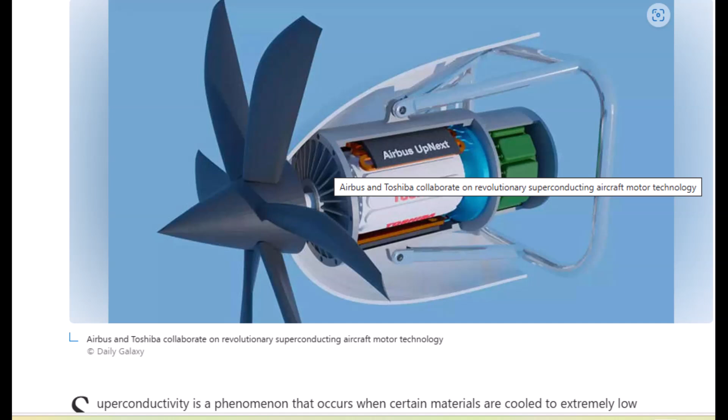Headline reads, Airbus and Toshiba collaborate on revolutionary superconducting aircraft motor technology. Ahead of you is a picture of this motor, and you can see the propeller, the engine, all the different parts, including the frame. Caption reads, Airbus and Toshiba collaborate on revolutionary superconducting aircraft motor technology. Copyright Daily Galaxy.

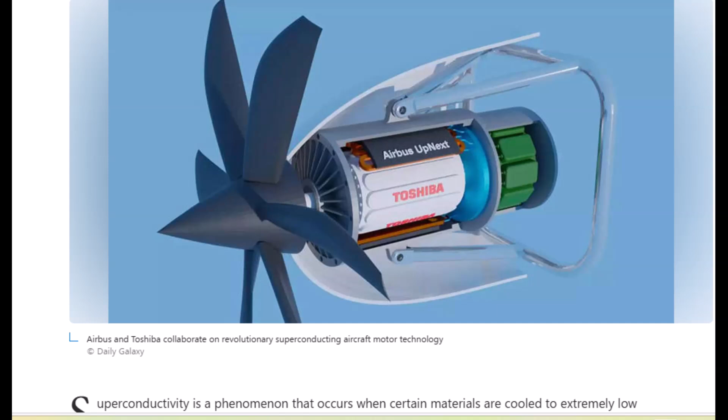Superconductivity is a phenomenon that occurs when certain materials are cooled to extremely low temperatures, causing their electrical resistance to drop to nearly zero. This property allows the creation of powerful and efficient magnets, which can be utilized in various applications, including medical imaging or MRI scanners, particle accelerators, power transmission networks, and electric motors.

In the context of aviation, superconducting motors offer significant advantages over conventional systems. Airbus claims that the superconducting motor is over 3 times lighter than traditional alternatives and boasts an impressive 97% powertrain efficiency rating. This remarkable improvement in power-to-weight ratio makes superconducting motors an attractive option for aircraft propulsion.

The collaboration between Airbus and Toshiba brings together 2 industry leaders with extensive experience in their respective fields. Airbus, through its subsidiary Airbus UpNext, has been exploring innovative propulsion technologies, while Toshiba's energy arm, Toshiba Energy Systems and Solutions Corporation, has been developing superconducting motor prototypes for over half a century.

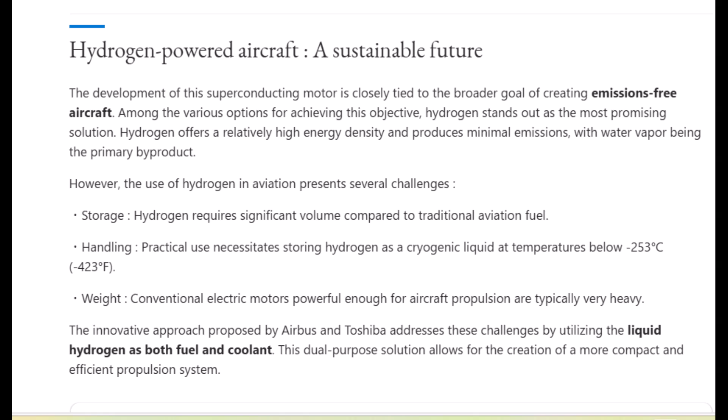However, the use of hydrogen in aviation presents several challenges. The first is storage, which is that hydrogen requires significant volume compared to traditional aviation fuel. For handling, practical use necessitates storing hydrogen as a cryogenic liquid in temperatures below minus 253 degrees Celsius, that is minus 423 degrees Fahrenheit. Weight: conventional electric motors powerful enough for aircraft propulsion are typically very heavy.

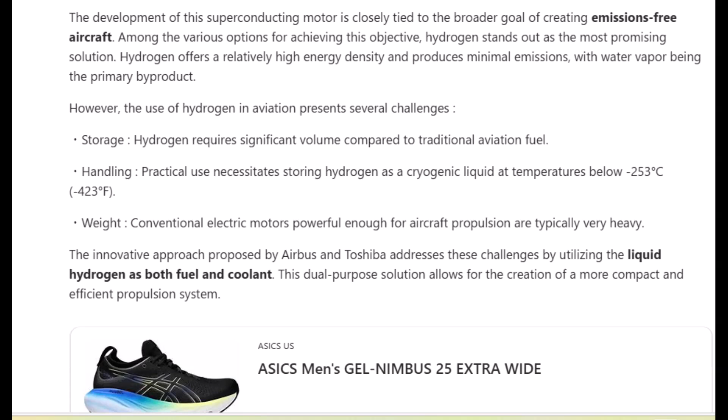The innovative approach proposed by Airbus and Toshiba addresses these challenges by utilizing the liquid hydrogen as both fuel and coolant. This dual-purpose solution allows for the creation of more compact and efficient propulsion systems.

Synergy of technologies: Cryoprop and superconducting motors. The partnership between Airbus and Toshiba, officially signed at Japan Aerospace 2024, combines 2 key technological improvements. By integrating these technologies, the companies aim to create a breakthrough propulsion system that could redefine aircraft design possibilities.

The liquid hydrogen used to power the fuel cells will first cool the superconducting electric motor before being fed into the fuel cell itself. This ingenious approach maximizes the efficiency of the entire system.

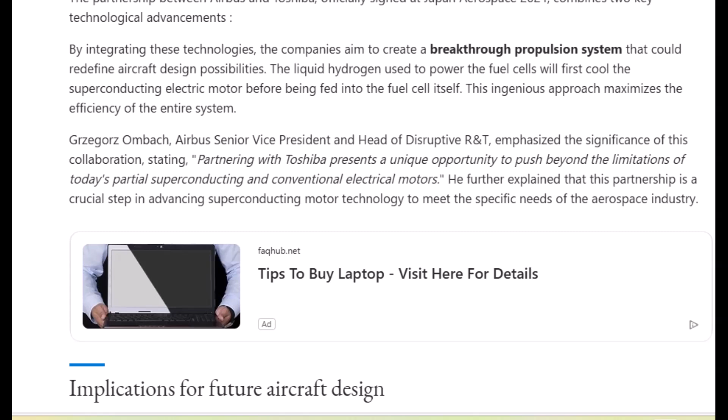Grzegorz Ombach, the Airbus senior vice president, head of disruptive R&T, emphasized the significance of the collaboration, stating: 'Partnering with Toshiba presents a unique opportunity to push beyond the limitations of today's partial superconducting and conventional electrical motors.' He further explained that the partnership is a crucial step in advancing superconducting motor technology to meet the specific needs of the aerospace industry.

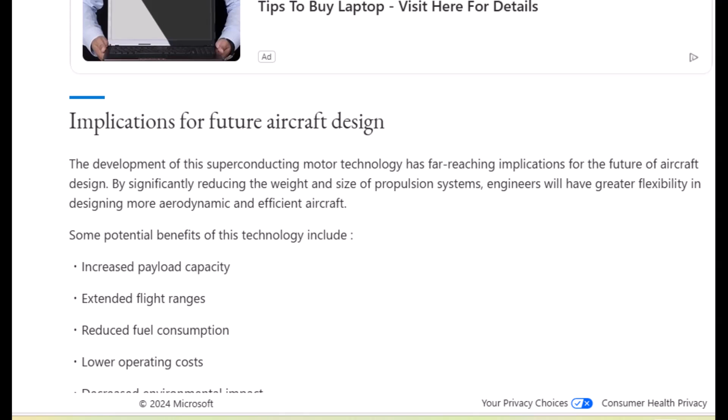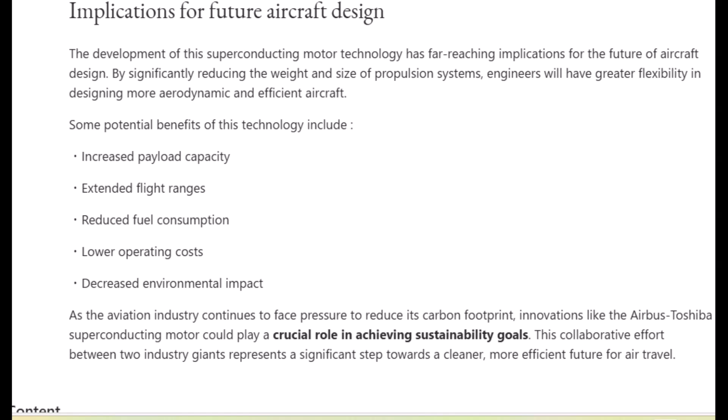Implications for future aircraft design. Development of the superconducting motor technology has far-reaching implications for the future of aircraft design. By significantly reducing the weight and size of propulsion systems, engineers will have greater flexibility in designing more aerodynamic and efficient aircraft. Some potential benefits of the technology include increased payload capacity, extended flight ranges, reduced fuel consumption, lower operating costs, and decreased environmental impact.

As the aviation industry continues to face pressure to reduce its carbon footprint, innovations like the Airbus Toshiba superconducting motor could play a crucial role in achieving sustainability goals. The collaborative effort between the two industry giants represents a significant step towards a cleaner, more efficient future for air travel.

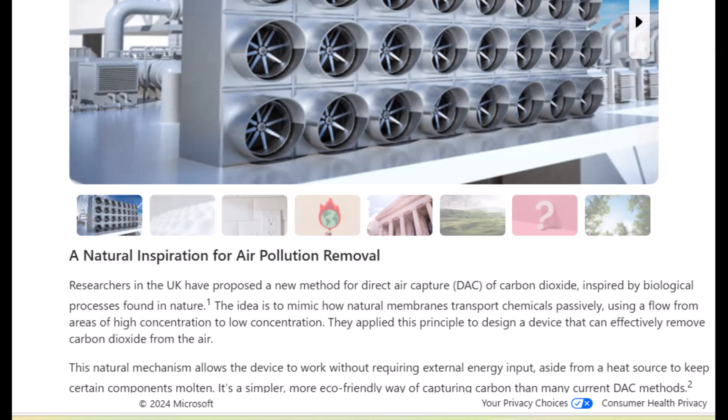Headline reads, Scientists make revolutionary breakthrough in air pollution removal without any electricity. Here's how it works. What you're looking at is actually a slideshow with an explanation. So we're going to do 8 of the slides, and for the first one, we're looking at said device here.

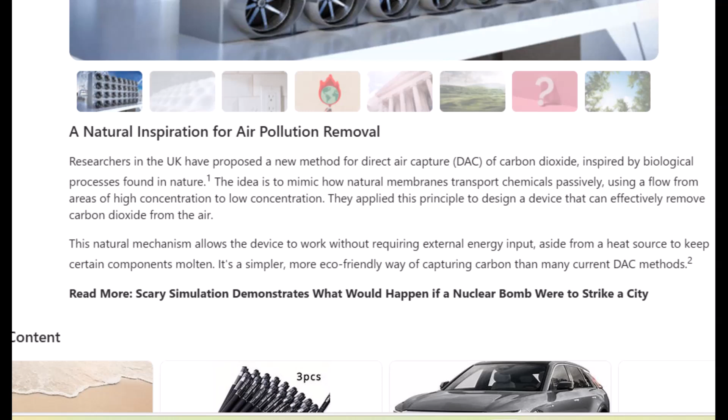Natural inspiration for air pollution removal. Researchers in the UK have proposed a new method for direct air capture, or DAC, of carbon dioxide inspired by biological processes found in nature. The idea is to mimic how natural membranes transport chemicals passively through a flow from areas of high concentration to low concentration. They applied this principle to design a device that can effectively remove carbon dioxide from the air. The natural mechanisms allow the device to work without requiring external energy input, aside from the heat source, to keep certain components molten.

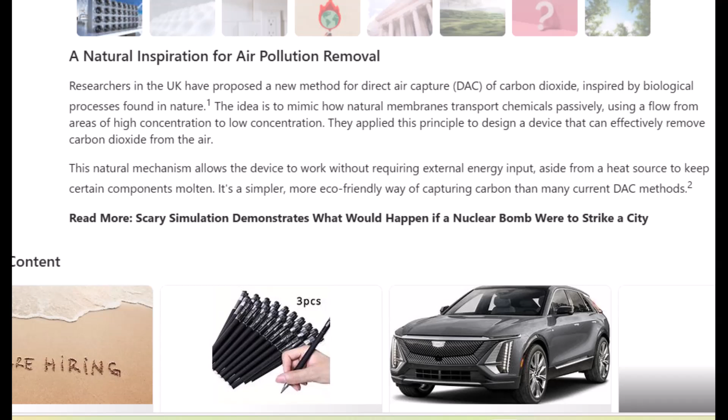It's a simpler, more eco-friendly way of capturing carbon than many current DAC methods. Let's look at our second slide.